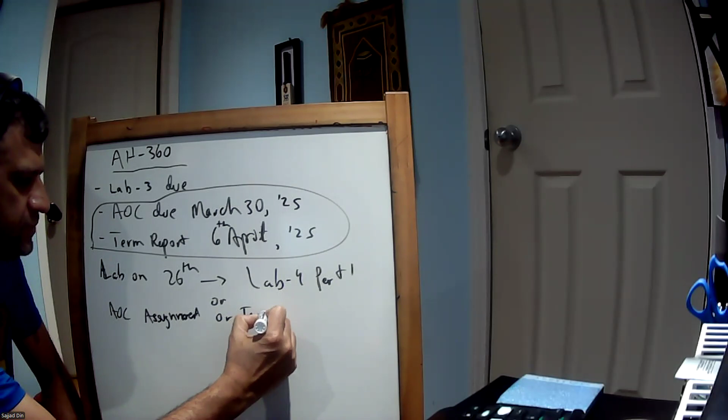So these are a couple of the main items coming up, especially these. Next week, we have our lab on the 26th. So for that, I would suggest you either work on lab 4, part 1, if you haven't, or if you want to take a break because it's not due, or work on the AOC assignment, term report, term project. Okay, so those are key.

But we'll probably have our final or one of our last few lectures on the 28th, online, but also a work session. How does that sound? So next week, we use both sessions to finish these assignments, especially the AOC and the term report.

And then on the 2nd, you will be going to the organic waste lab, the organic waste plant. So that lab will be replaced by Andrew's class on the 3rd. And then on the 4th, we'll have our lecture/lab session in person. The only thing is you'll have to bring your own computer.

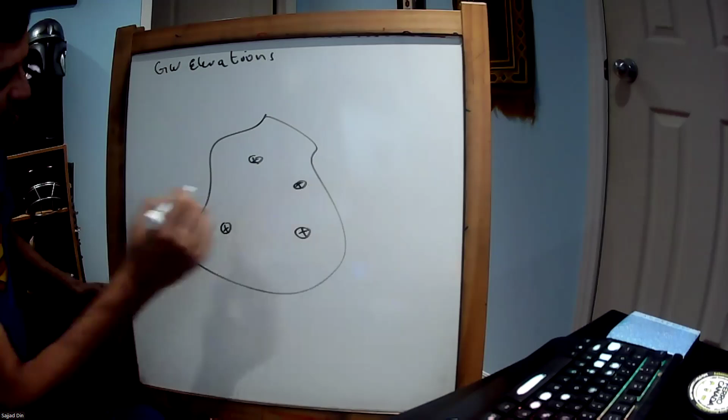Let's say it's not a triangle here, but you've actually got the elevations. We'll put it in different colors. And how did you get that elevation? You measure the water level. So let's say this is 131.10, 136.22, 135.11. It's not always this simple. And you've contoured it, whether you've done it with your hands or done the contours with software. So let's say we're going to use 132. And then you want to label it, so it's in meters above sea level.

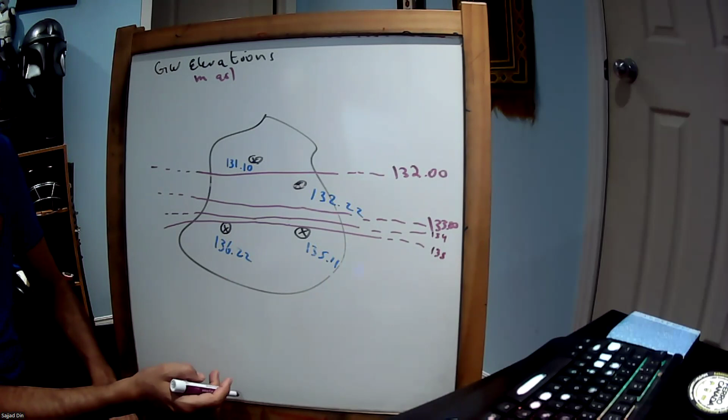And then you've got 133, 134. We've got 135. So here at the groundwater, it's quite - actually, this should never be touching. You've got the groundwater, it's quite steep. When the contours are closer together, the gradient is higher.

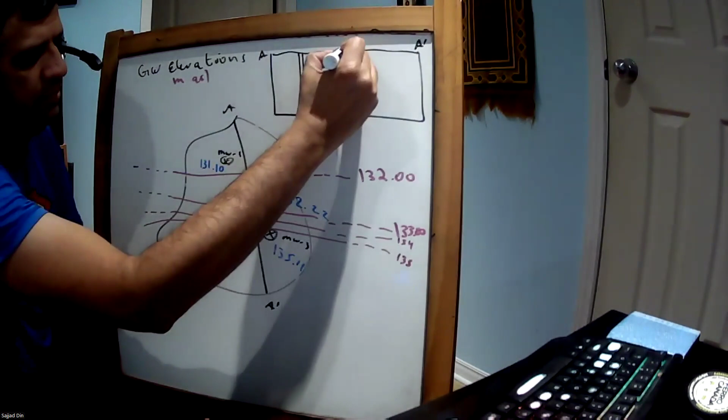Because what's happening here, what you've just mapped, is just imagine it's the cross section of your site. Let's say this is monitoring well 1, monitoring well 2, monitoring well 3, monitoring well 4. And let's say you've drawn a cross section A to A dash. That's A to A dash. It's monitoring well 2, and then monitoring well 3.

Essentially, what you're basically showing here is, see, the dip is much steeper over here. And you guys did this in topography, so I don't want to spend too much time on it.

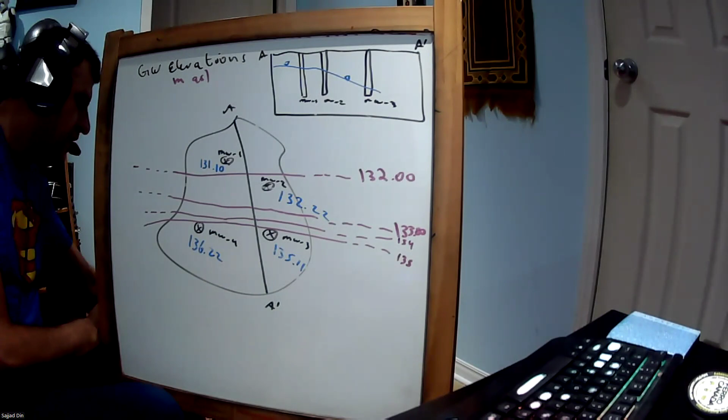But another thing I wanted to point out is you can now, with this information, determine what DH is. What is DH going to be equal to? The difference in the groundwater elevation. Let's say we're trying to determine the groundwater flow. Let's use this: 135.11 minus 131.10. DL is the distance between 1 and 3. Let's say the distance is 67 meters.

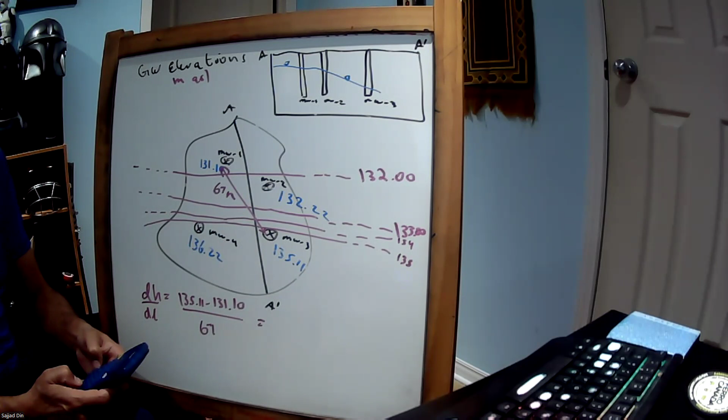Go ahead and calculate that. 135.11 minus 131.1, that's 4.01, divided by 67, that's 0.0598 meters per meter. And what is that? That is also known as the hydraulic gradient.

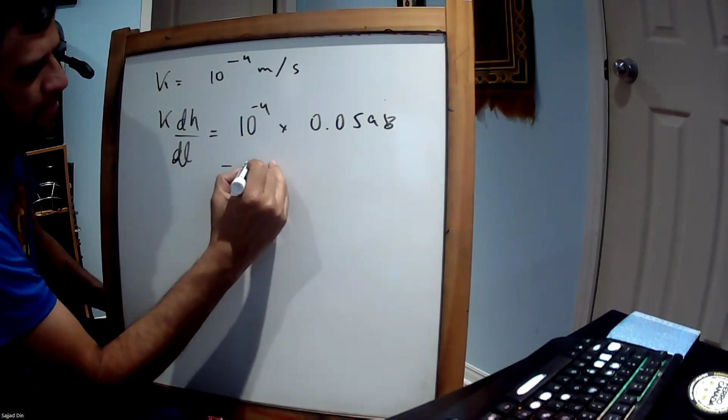Now, if you know the K value, you can multiply it. If you know what K is, let's say it's 10 to the power minus 4 meters per second, you just multiply that by dH by dL. This gets to be 10 to the power minus 4 times 0.0598, so this is equal to 5.98 times 10 to the power minus 6 meters per second.

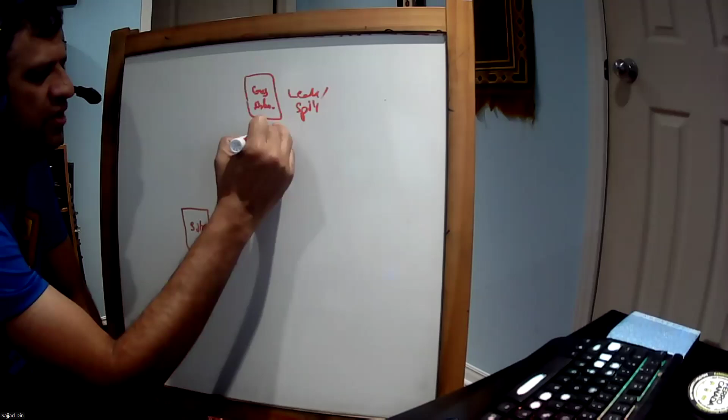So let's consider a situation where you are performing a site assessment. Let's draw your site. That's your site. And you find in your study that there was a gas station here, and the ERIS report says there was a leak or spill, and it was underground. Maybe you found this out through a record of site condition. And you know, based on the map, that the distance from your site is 44 meters.

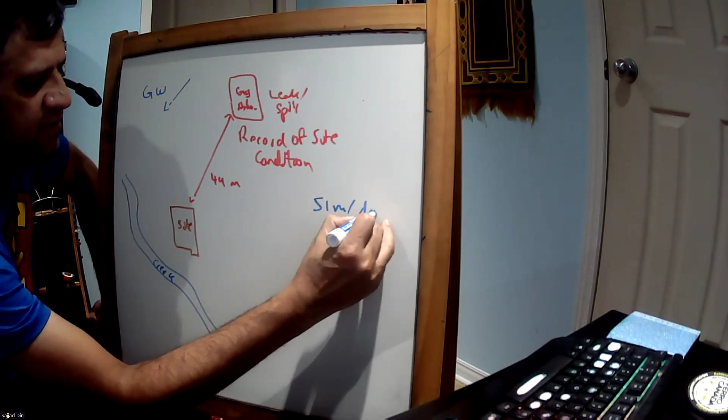You also know, based on your study, that there's a water body nearby, a creek. And the dip of the topography is in this direction, so you surmise that this is where the groundwater's flowing. Now, based on that information and the calculation that you just did, that it goes 51 meters a day, there's a likelihood that your site could have been impacted.

And this is the PCA. So this is the PCA, and this is the area of concern. So this is where you'd put your wells. Let's say you found contamination.

So what are some of the options? And that's where we are getting into now. How do you respond to a spill? Spill response. So we'll go over some of the technologies and methods that you respond to spills.

So first, let's consider a scenario. We're going to go back and forth, but there's two or three types of spills that I'm going to talk about. One is the subsurface, so you're dealing with groundwater contamination. Two is a limited indoor spill, so it's basically superficial. And then there's the major or larger scaled exterior spill, like a railway track. So we're going to be jumping back and forth.

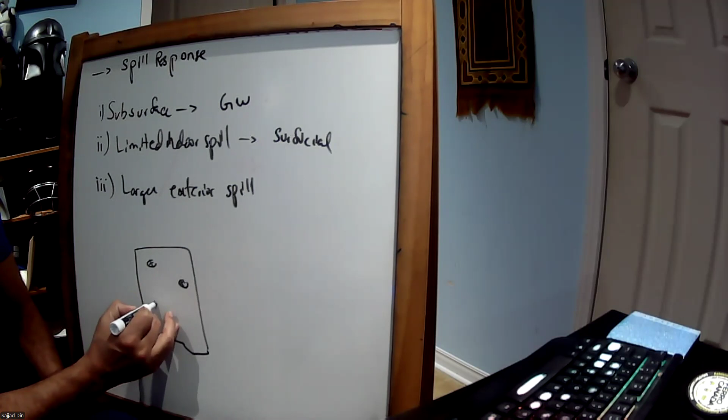In this situation, what we have is we have our site. And we know, let's say we did the study, and we know that we've got contamination because a bunch of the wells came out impacted, and we've delineated that the contamination is limited to this portion. Now, let's say you clean up the site. How do you clean it? Well, there's different methods, but right now, let's say you've cleaned up the site. What's to stop the spill from continuing to come?

Is there anything to stop it from continuing to come? Well, actually, no. But because you've done your groundwater studies and you know the direction, let's say here's the plume. It's the ground surface. Here's your site. And groundwater is flowing in this direction, meaning the plume is flowing like this, and it's entering your site. So in the subsurface, your site boundary is here. So what can be done?

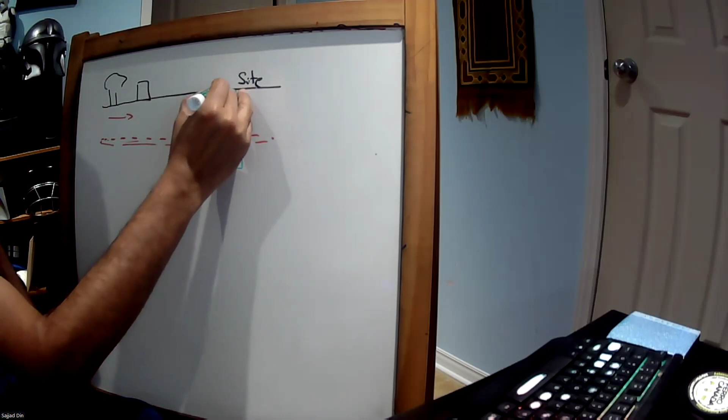What you can do is install what is known as a permeable barrier at the boundary. What you do in the permeable barrier is it's a mixture of sand and zero valent iron, or ZVI. There's companies that can come in and create that trench for you. It's also known as a permeable reactive barrier. So what happens is when the groundwater flows through, it's getting treated.

Let's see if I can find a good one.

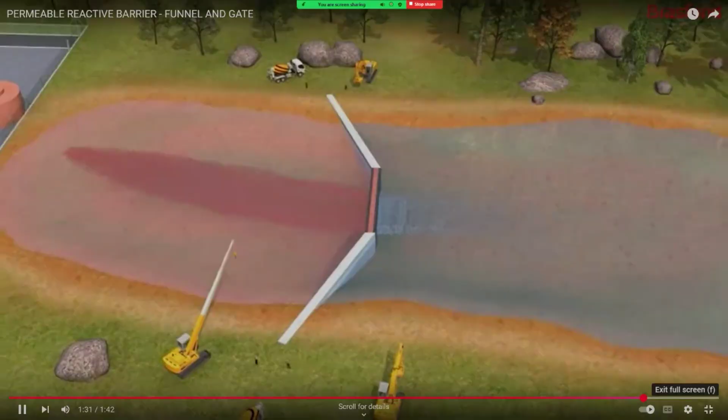So that's one method, a permeable reactive barrier. Another method is a Waterloo barrier, just putting a wall. I'll show you how that's done in a second - a Waterloo barrier for the groundwater. This is especially done when you've got a lot of contamination that you just want to keep out.

I'm just going to explain it here. In case of a Waterloo barrier, you do it slightly differently. So you've got your contamination coming to your site, and you can't really stop it. The client says, no, I'm not going to build a permeable reactive barrier. So they said no to a PRB, permeable reactive barrier - they've already said no. You've got contamination flowing onto your site, toward the site boundary.

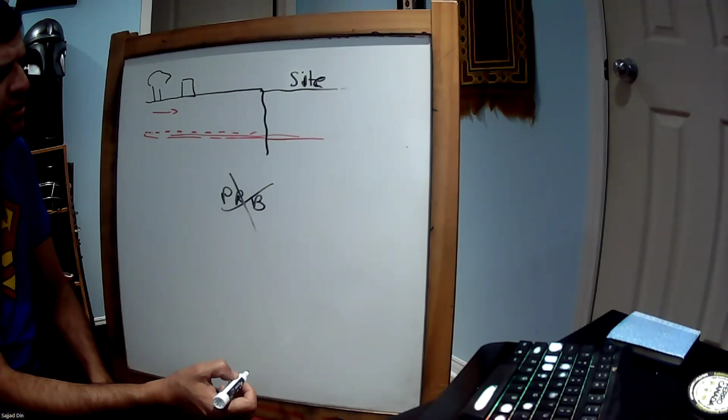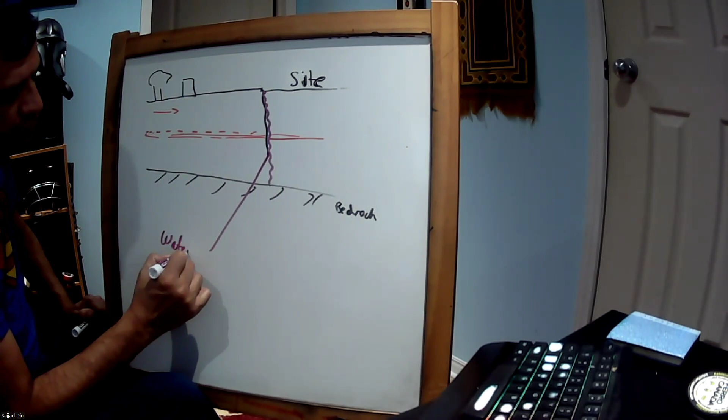So they said no to the barrier. What you can do is, let's say you've got bedrock at about 30 feet, and it's consolidated, so you know that the groundwater is not flowing through it, where you've got this plume. So you can actually go back and install at the property boundary a Waterloo barrier, which is a steel wall, to block this contamination from coming onto your site.

So the hope is over time that it will attenuate, but maybe it won't. So I'm going to share with you something that you might find helpful - some information on permeable reactive barriers or treatment walls. The concept has been around for a while.

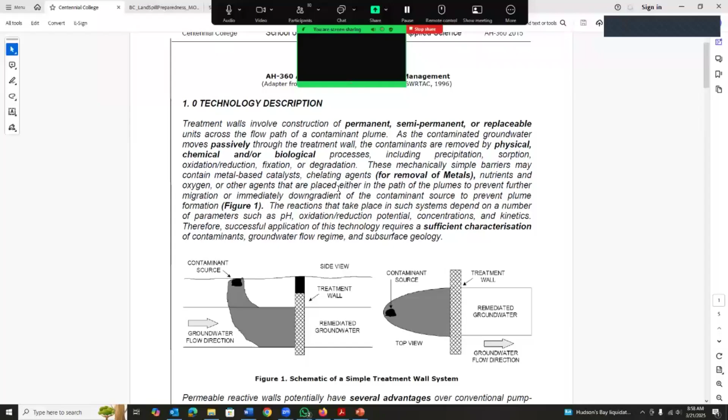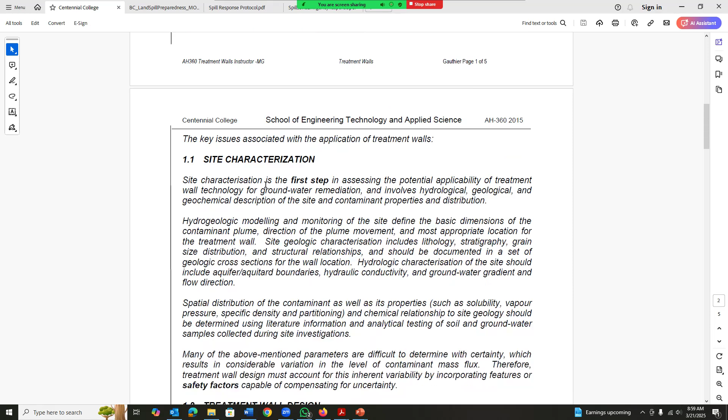But essentially, you've got your contaminant source, the flow direction of groundwater, and the treatment wall, which now allows for treated groundwater to flow through. They don't have to be all the way up to the surface, but they have to be set up in such a way that they cover the groundwater column. Sometimes you might have to replace the material, dig it up and replace it to refresh it, depending on how much contamination you're dealing with.

But the first step is always to characterize the site, do some hydrogeologic modeling, do some aquifer testing. Then based on the contamination you're dealing with, you want to set up the wall with the proper treatment mixture. Like I said, we usually use ZVI, and this is not commonly used for anything other than organics.

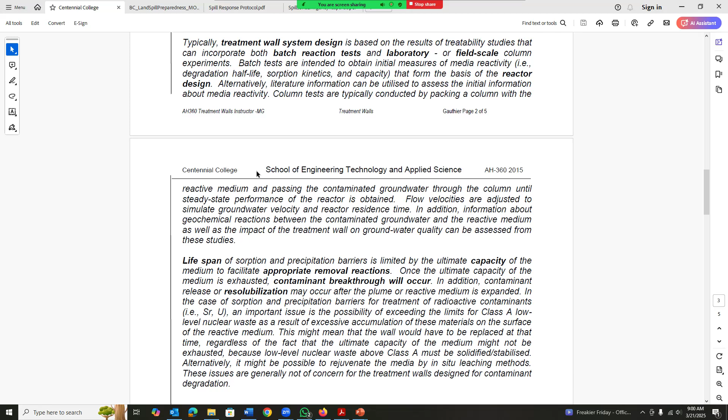Different companies have different methods to dig it, and the company that we've used in order to dig this is known as DeWind. They're an excavation company that does trenching. I haven't been involved in such a project in a little bit of time. They will go ahead and in one pass create the trench, and then you can install your barrier. Because what used to happen in the past is we would have to go out to the site with equipment and install the barrier.

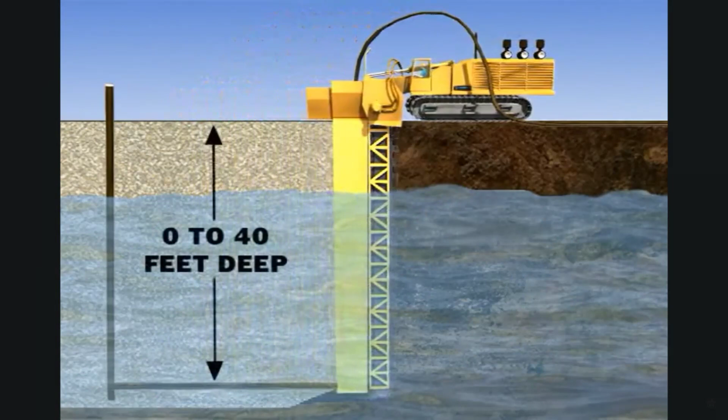They do pretty good work. All right, but in order to understand - what do you need to know?

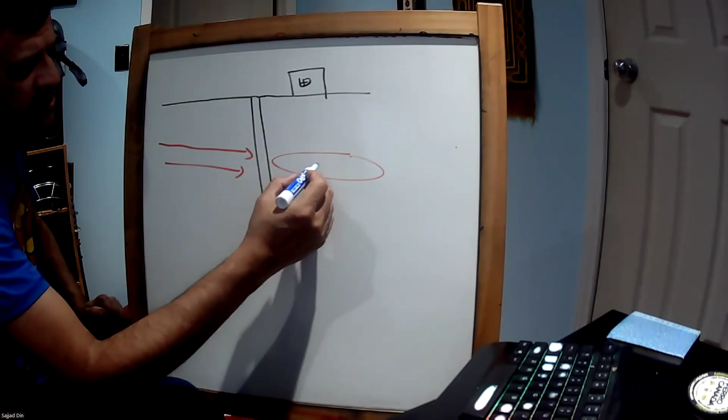That's one way to deal with the water. Another is, now you've got your site - so you've already dealt with the offsite, right? Got your trench, but you still have contamination at your property. So the trench is blocking the offsite, but what about the plume that's already on site? What do you do about this plume that's right here?

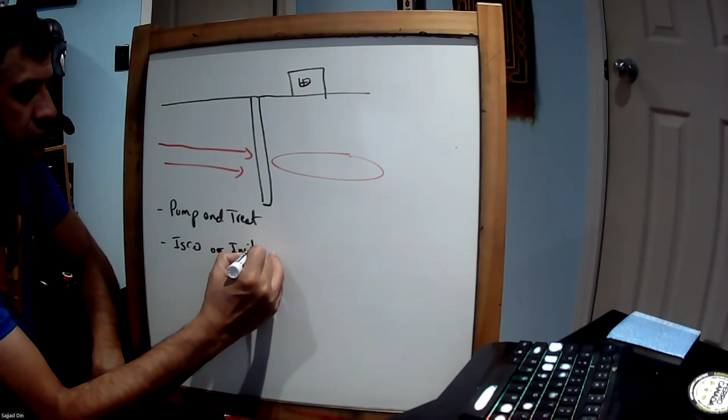So there's a couple of methods to deal with it. Number one, pump and treat, or ex situ - that's one. The other is ISCO, or in situ chemical oxidation.

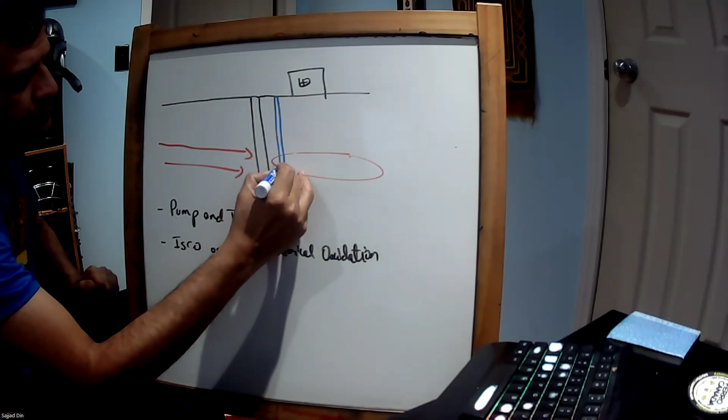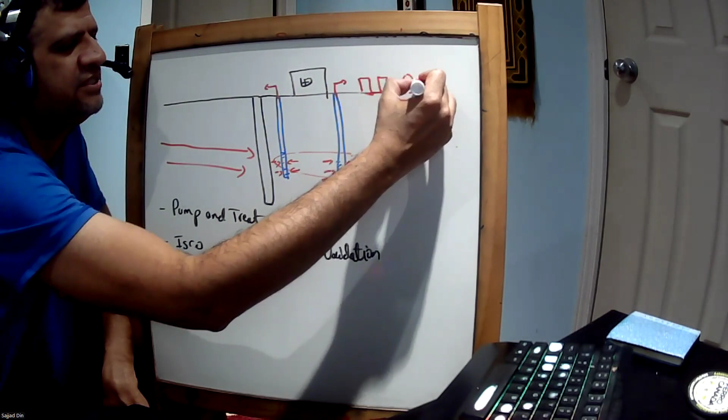So the first is, as it implies, pump and treat. You could put a well into the ground, or a series of wells, and you pump it out. What you're trying to do is pump out the contaminated material, and then you send it to your mobile treatment system. Remember, you designed it last semester. You're pumping it out.

Before you set up the pumping system, what do you want to know about the site? Again, you have to do site characterization. And the second method is in situ chemical oxidation.

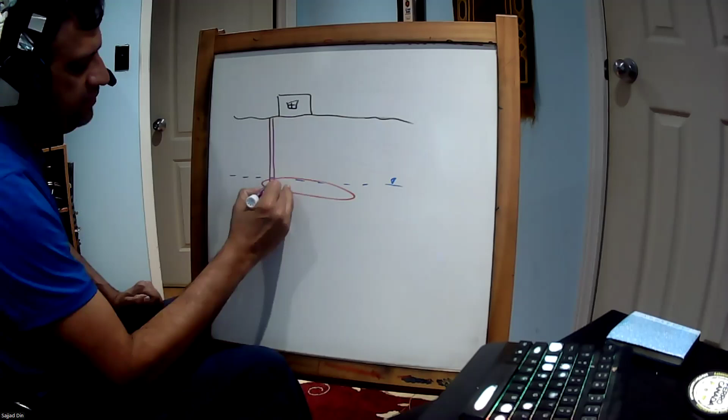You've got your site, got your groundwater plume - it's the groundwater, but it is infested with a plume. You can now perform what I said earlier, which is in situ chemical oxidation, by injecting. So you can inject a chemical like potassium permanganate.

Or sodium peroxide - I don't remember the chemical formula, so I'll actually write it as sodium peroxide. You can also use sodium persulfate. What it does is it oxidizes the chemical. In this case, you're pumping chemical into the ground to create a scenario where your oxidant is breaking down the material. Let's watch this animation of how in situ chemical oxidation works.

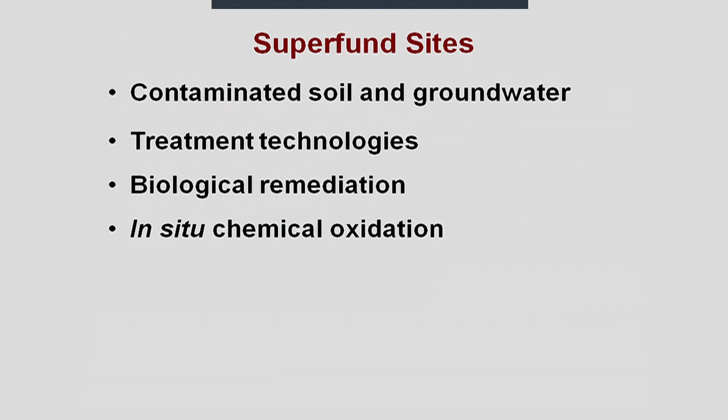A reagent to oxidize these contaminants. There is also a larger group of treatment technologies called in situ chemical oxidation, ISCO for short, that utilize different types of highly oxidative reagents to oxidize these contaminants.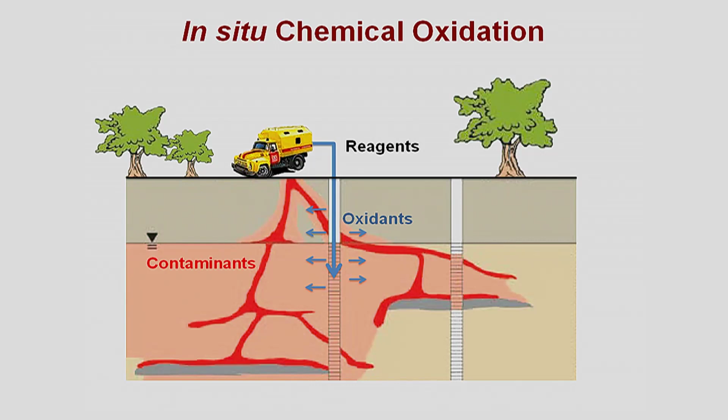So how does in situ chemical oxidation work? Basically, we have a big plume of contaminants in the subsurface, shown in this orange color. When we treat the organic contaminants, we have a truck loaded with reagent, and we inject this reagent into the subsurface. These reagents react with the reactive phases of the soil minerals to generate highly oxidative oxidants, which permeate into the subsurface and oxidize the contaminants.

The traditionally used oxidants for this in situ remediation include hydrogen peroxide. If we look at the chemical structure of hydrogen peroxide, it has a peroxy bond, and it is this peroxy bond that is responsible for the highly oxidative properties of this chemical.

In addition to hydrogen peroxide, a very similar compound is called persulfate. Persulfate shares a very similar chemical structure with hydrogen peroxide - it still has the peroxy bond, but instead of a hydrogen bonded with an oxygen, it is an SO3 group bonded with an oxygen.

So how does sulfate radical formation proceed via persulfate activation? In the subsurface, we have many different types of soil particles enriched in iron elements - basically iron oxides in the +3 oxidation state. When we inject persulfate into the underground, persulfate oxidizes and reacts with iron 3 through a one-electron transfer process as a redox reaction. Persulfate is oxidized into persulfate radical, and in turn iron 3 is reduced to iron 2 in the soil particles. But this is just half of the reaction.

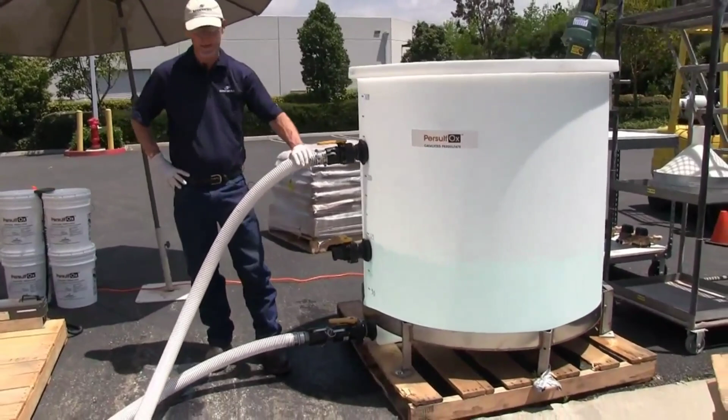A little more detail on the mixing side. I've preloaded 125 gallons of water into our 300 gallon tank. Here's our water level, and you can see everything is connected up to our pump from the tank. We have influent and effluent out of the pump. We've also added a lightning mixer - this is just a traditional vortex mixer. So we'll use both the inline pumping machine as well as the vortex mixer to mix up our PersulfOx.

In most applications, field personnel should allow themselves roughly 15 to 20 minutes to mix a batch of persulfates. So given this kind of setup, this is exactly how it looks.

The ISCO mobile treatment plant treatment system on the surface - they used to have it automated in many sites, but here in Canada it turns out to be a disaster if things go wrong. That's why actually having actual human beings on site, as opposed to robots or running the system remotely, is key so that nothing goes wrong and you're not seeing chemicals being injected and going the wrong way, or having humans exposed to the chemicals, or the system breaking down on site.

As you can see, there's a lot of things that can go wrong. Right now you're looking at picture perfect conditions - this could be Florida or someplace warm. Are we going to get these conditions in Ontario all the time? Of course not. Count on about 15 to 20 minutes.

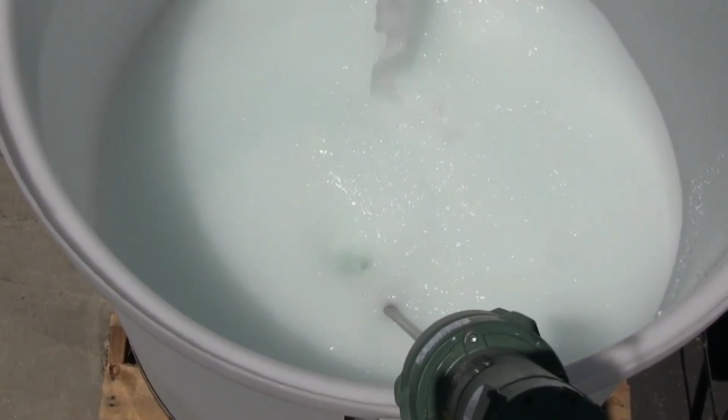So I've been mixing our 15% PersulfOx solution for about 10 minutes or so. We're almost where we need to be on the material - as you can see, it's very soluble. Once this solution is ready, it gets pumped into the injection wells, into the injection points. 100% soluble. After about 15 minutes of mixing, you should be ready to go.

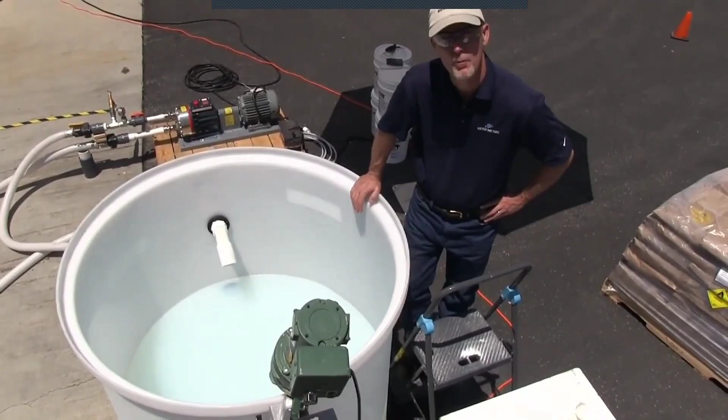Now let's take a look. Once you've injected it, you tend to let it sit and wait, depending on - this was actually not, this is a catalyst. So what that should be was hydrogen peroxide. Let me correct myself.

If you need to use a catalyst, sodium peroxide is used, but the actual oxidizer might be hydrogen peroxide or sodium persulfate. These were two of the common ones. Another one is potassium permanganate.

Once you've injected the material into the ground, you let it mix and work on the different areas or locations of the contaminants. You wait about 3 to 6 weeks, depending on how much you've injected, and then you sample the groundwater again.

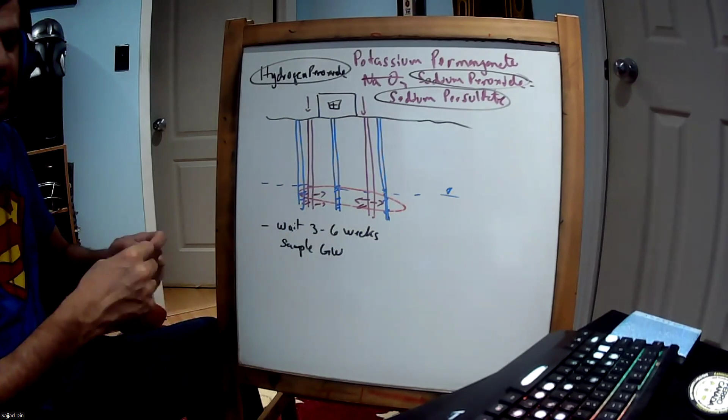Now, if you're using injection wells, you're supposed to have separate monitoring wells. So maybe you've got a monitoring well in between, and a monitoring well over here, to see how the progress is. This is where it becomes interesting, especially in the reporting phase.

Let's say you start off at monitoring well 6, and you've got the contaminant concentration - let's say it's TCE in this case. You're sampling every 3 months, so let's say this is October, January or February, and then May, and so on.

What you're hoping to see is the concentration of the contaminant, especially if you're aggressive, to dip. And if the standard - the MECP standard - is here, you want to see it dip to below that level over time.

Now, a question for you guys. Let's say the cutoff date for the injections - because remember, you wait 4 weeks, you come, you sample, then you come back and inject again. End of injection program. Let's say you've injected here at the start, you inject again, you inject again. Now that's the end of injections.

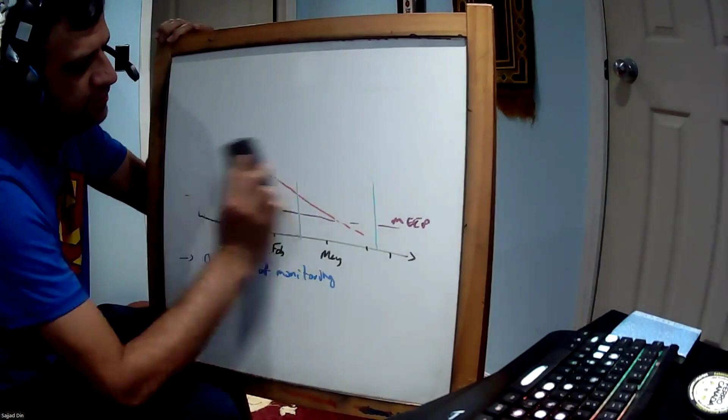Okay, so the next main thing we're going to talk about is what you need to know before you can practice this type of injection. But just to summarize, remember in the pump and treat, the typical treatment train is you might have a settlement tank, and then you'll have filters, and then you might have granular carbon vessels. Or, depending on the contaminant, you might even have activated alumina. So this would be for pump and treat.

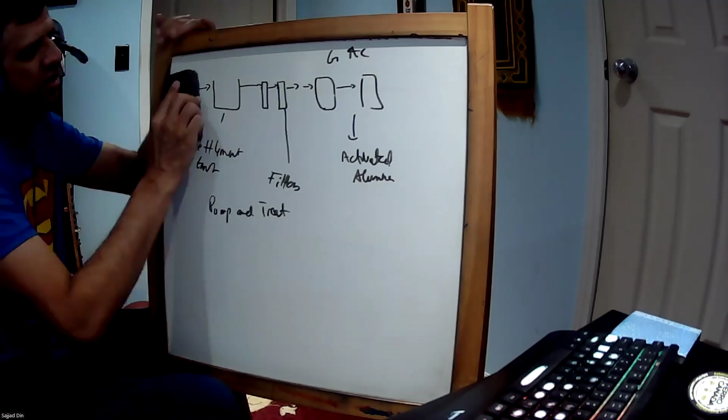But I wanted to mention something: 9 times out of 10, you need to supplement the pump and treat with some form of in situ chemical oxidation. Why? Because our experience shows that in most sites, let's say you've got a contamination level that's over here, and you're trying to achieve a cleanup level over here according to the Ministry of the Environment - these are the concentrations, this is time. Pump and treat has really good initial results very quickly within weeks. Concentrations tend to go down.

But for whatever reason, it seems to plateau and even come up a little bit over time after you've done the initial pumping. But this is where it's important to understand several things before you perform a cleanup at a site.

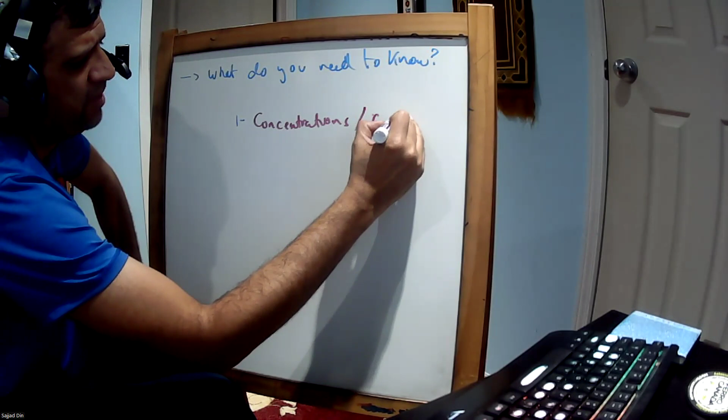So what do you need to know? What do you need to know? Does anybody want to help me with this? So what do you want to know about the site? What's the first thing you want to know? It's a subsurface spill - what do you want to know? How about the contaminants, the concentrations of contaminants and compounds? So what are the parameters? What else do you want to know?

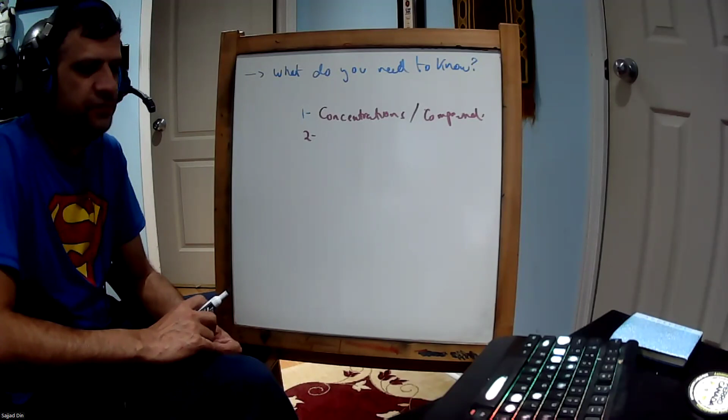What do you need to know? What do you, well, from what you talked about - yeah, you're cutting out. Could I ask Cody to speak on my behalf? Well, it's okay, so I've typed it in the chat. Yeah, sorry.

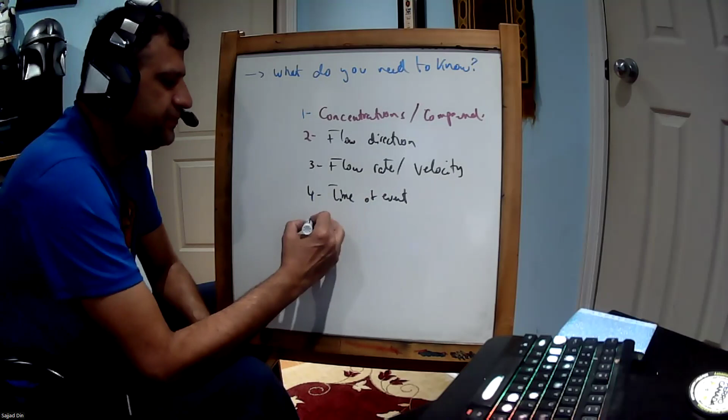Flow direction, 100%. Flow rate, yeah, flow rate, or velocity. We also need to determine the amount of time that has actually elapsed since the spill happened so that we can determine how far it's traveled so far. Yeah, so sometimes you have that information, sometimes you don't. Time of event is definitely crucial. Yeah, if we have it. Okay, that's perfect, that's actually exactly some of the information I was hoping you would come up with. Source - what caused the spill? 100%.

Okay, room number 2.

Who was in room number 2?

We can say that the type of contaminants, whether it's a VOC or something else, is relevant. Yeah, true.

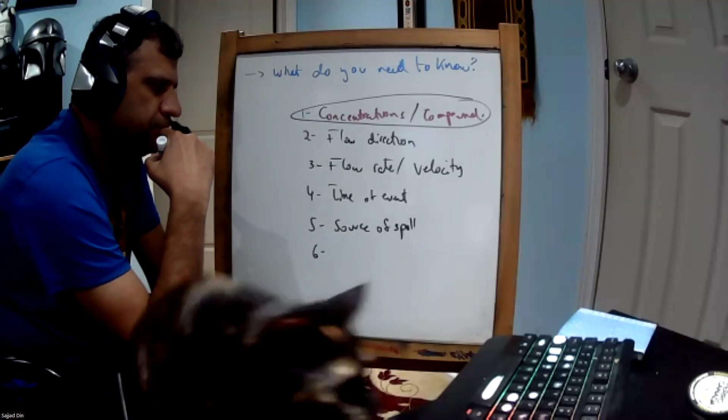What else do you think is missing? And if we are sampling the soil, how much depth are we going to sample? How would we know this before remediation? So we need to know the permeability, the aquifer parameters.

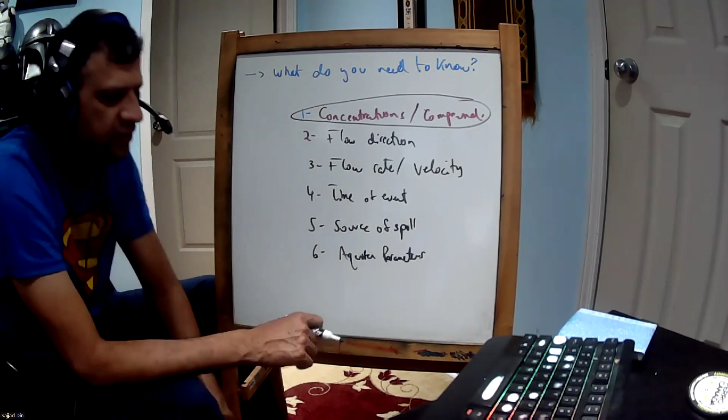Professor, can we also check the wind direction, like for airborne contamination? For a groundwater spill, it has no relevance. But for a surficial spill, yes, you would. The wind doesn't impact the process for a groundwater spill because the concentration in the air is usually not a concern, but that would be the case for a surficial spill for sure.

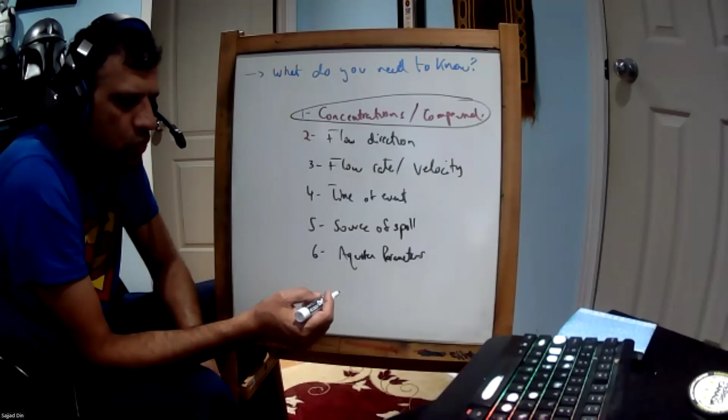So Chinu, were you asking if we should know the depth of the sample? No, I was saying about the permeability, how far it extends. Yeah, you need to do the aquifer parameters. And then the last one is we need to determine the areal extent of the contamination, delineation if you can.

So I'm going to touch on these points, and then we'll continue the conversation.

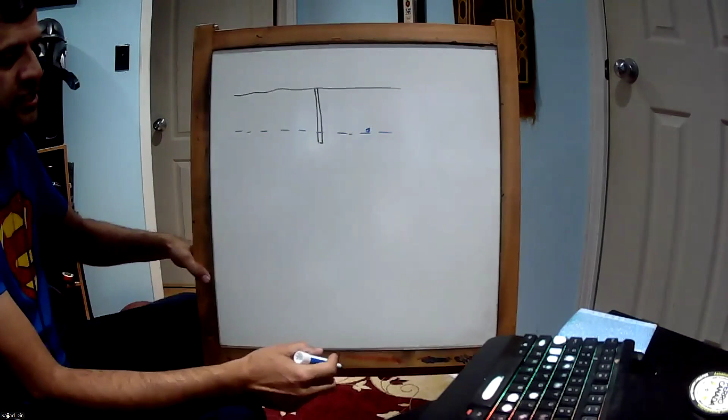So let's say you have a bunch of wells that you drilled on site, and you tested the aquifer and the groundwater. Since we're dealing with just a groundwater spill right now, we're going to focus on groundwater contamination. We'll spend a little time on excavation in the waste portion of the other course, but here we focus more on groundwater contamination. So what Crispin just mentioned, which was excellent, was: if you found contamination, how far do you think it went?

How deep do you think it went? That's what it's called. What you do, this is the horizontal delineation. And then you might also want to know how deep it's gone. That's the vertical delineation. I'm going to explain why this is important.

In order to do that, you add more wells. Why is this important? So let's say you have the areal extent of the plume on your site as 700 square meters, and you've determined the aquifer thickness where it is, from a depth of 2 meters to 4 meters, which equals 2 meters thickness. So that means the volume of the plume is 700 times 2, which equals 1,400 cubic meters.

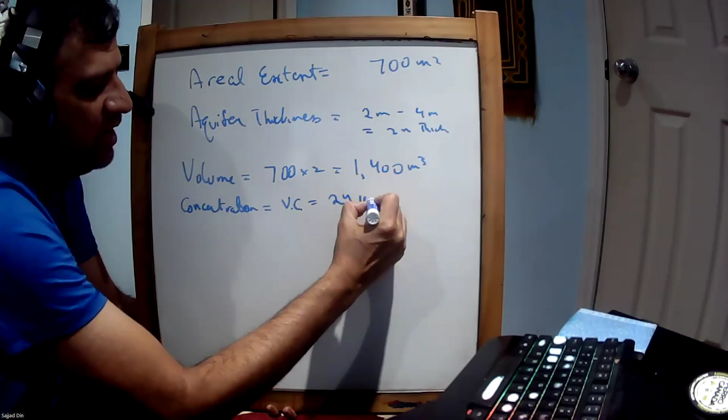Now, your concentration of contaminant, let's say just for one contaminant, vinyl chloride, VC, is 24 micrograms per liter. So what is the contaminant load that you're dealing with? The contaminant load can be calculated because that will help you design the treatment project, like how much chemical you need to inject, how long, at what depths, at what frequency, and the concentration of the oxidant. That's beyond the scope of this course, but the contaminant load helps you design the overall project.

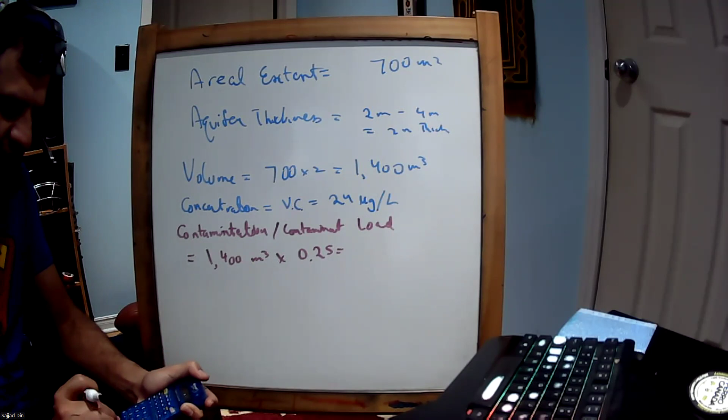That's going to be equal to 1,400 cubic meters as the volume. But is that really the volume? Because if the porosity is 25%, then the actual volume is 1,400 times 0.25, which equals 350 cubic meters. Convert that to liters: 350 times 1,000 equals 350,000 liters. We have 24 micrograms per liter.

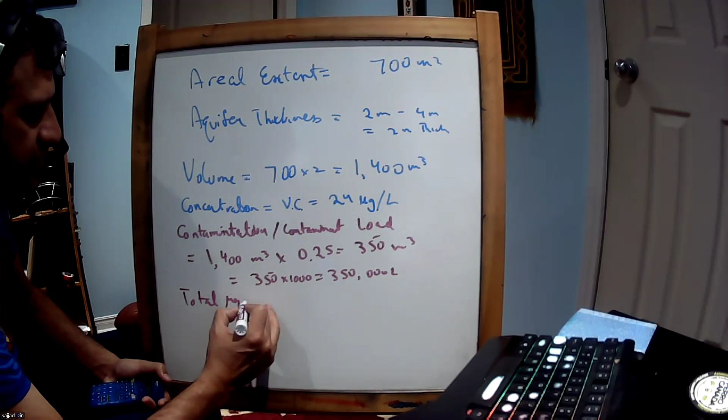So total micrograms is equal to 24 times 350,000. What is that equal to? 8.4 million micrograms. What is that in grams? 8.4 grams. That is the amount of actual chemical VC that you're dealing with, and you can design accordingly. So that was one of the things you guys mentioned, which was excellent.

Another thing we've already determined is flow direction, right? We've already talked about how to determine that at your site. Flow rate - this is where it becomes extremely dicey, so we're going to do this a little bit carefully. But this is part of your lab 4.

Remember I talked about the slug tests? We're going to get into that detail now. It's a long video, but it's important - we're probably going to split it up. Slug tests to get the aquifer parameters, flow rates, etc.

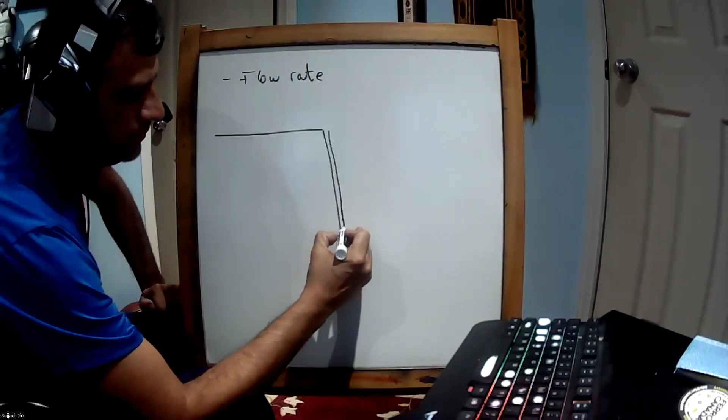Okay, so now what's happening here? What's happening here is that they have - so basically what was being described is you've got your well. That's the static water, right? He measured it - I don't remember if you guys noticed - he measured it, I think it was 2.75 meters below ground surface.

Then he dropped the slug, and it raised the water level - that was 2.56, I think. And now what's going to happen is that over time this level is going to stabilize. And what you can do is enter that data, how long it took. So in this case, let's say you've got the static water level minus, or the dynamic water level, the new water level, minus the static water level. That's going to be large at the start, but it's going to go down over time. And how fast this stabilizes helps you determine K.

Now, something I want to point out here which is going to help you in your lab number 4. So I'm going to set up a scenario, and I want you guys to remember this. You want to know how long it took for the water to recover 37% recovery, or recharge, of the well.

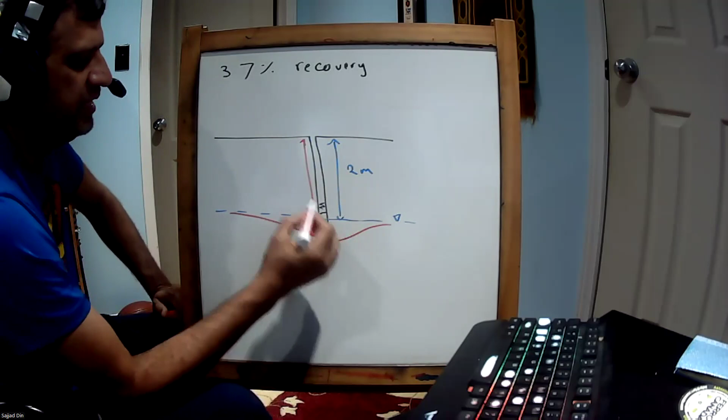So let's say you've got a situation here. We've got a well performing, and in this case we remove a slug. The static water level, let's say it's 2 meters below grade. We remove a slug of water, a little amount of water, or we pump out some water. And now the dynamic water level at the end of pumping is 3 meters. Then we watch the recovery. So we've got initially the difference between the two.

That would be called drawdown. So drawdown would be, in this case, the dynamic water level, 3 meters minus 2 meters. So that's 1 meter, that's the drawdown. So at the start, the drawdown is 1, but as the water keeps filling up, the drawdown reduces.

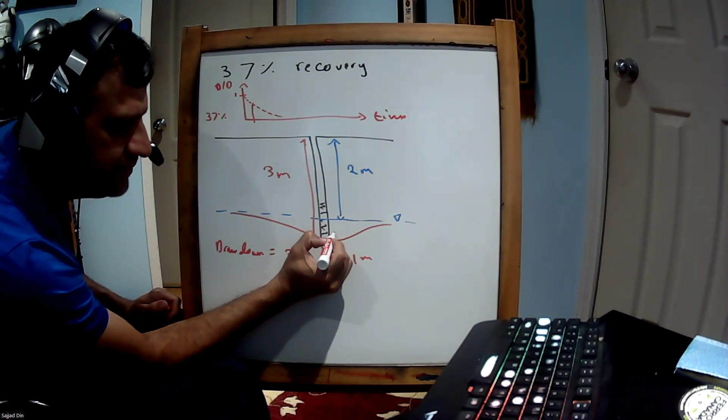And what you're looking for is you want to see how much time passed for 37% recovery. Meaning, how much time passes for this to recover 0.37 meters. Does that make sense to you guys? This is going to be helpful to you in lab number 4, where you're going to be using Hvorslev's equation.

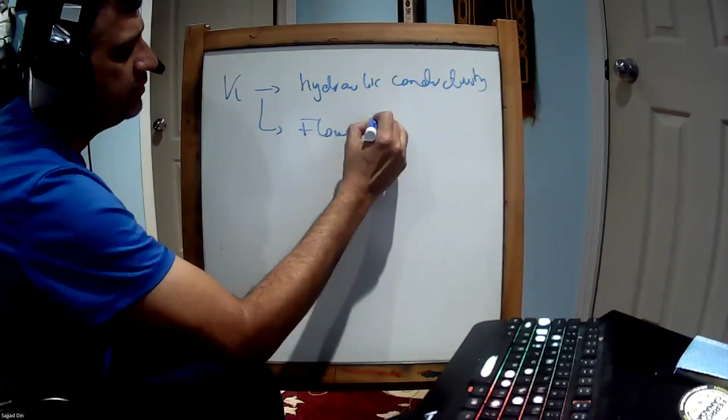And that will help you determine K. Once you know K, based on this type of test, once you know K, it can help you determine, which is the hydraulic conductivity. It can help you determine the flow rate or the velocity. And that will be of high importance in a remediation project of a spill.

So, coming to the next item, we can use software to enter this data and calculate this. So let's see. AqTeSolv is one of the more famous ones. So let's see a demo for AqTeSolv. And then we'll take our next break, and then we'll continue with the last part of today's class. So AqTeSolv.

We don't have time in the class to work on it, and it's a little bit pricey, so we haven't really done anything with it, but you can download the demo version. Let's go ahead. It's commercial software called AqTeSolv to determine parameters such as transmissivity and storativity for an aquifer. So first thing is you need to download the data, download the software. AqTeSolv provides a demo version of that, which is free. But if you look for the full functionality, then you have to pay for the price, which is around several hundred dollars. Okay, so once you download your data, once you download your software, then let's take a look at the questions that we have.

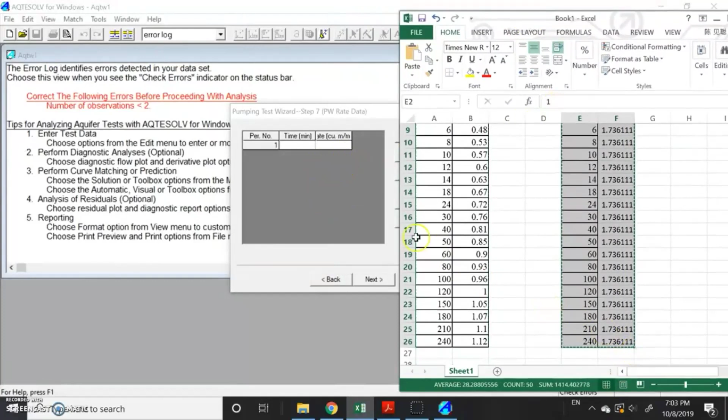And then click next. So this is the place that you can specify your data set. I copy pasted the data from the PDF file. And here is the place that you need to specify your pumping rate. As we can see, the data we have is basically a constant pumping rate, so it doesn't really matter too much. However, in certain conditions your pumping rate may be different, then you would just change correspondingly. After you do this pasting, you can see the first row doesn't really have data, which doesn't really matter too much. And then you click next.

And then here's the place that you tell the software where exactly your observation well locates. From the question, it's 60 meters away, so we just put 60 there and then click next, and then next for this as well.

And then we leave this the same as what we did before for the pump well. And then this is the place that you tell the software what is your drawdown measurement. So I convert the units as well, and then you copy and paste. And then you click next.

So this is all the things that we need. You can see that the error log identifies errors detected in your data set. Choose a view when you see the check errors indicator on the status bar. As you can see, the fonts being highlighted in the correct way show that no errors are detected in the data set, which means we're all good to go to determine our data.

So for example, we can display the time and displacement. So this is also related. We can see that the time is in a log scale, which is usually how you can do that by hand as well. And then this is the data that is being shown up here.

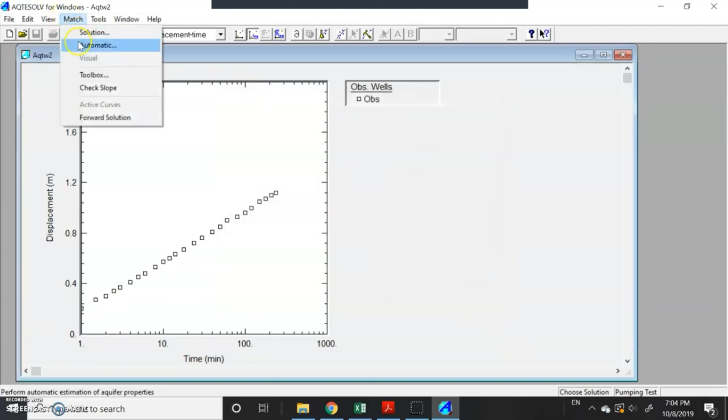And the next thing is that we want to fit some solutions. So first, we can, it's basically you click this match, and then solution, automatic solution doesn't matter too much. And then you have to activate the solutions, so solutions that are currently inactive. And then here we are working with the confined aquifer.

So you click confined aquifer and you can choose a Theis solution or a different kind of solution. There are all different kinds of solutions available. If you're interested in knowing what exactly each solution represents in terms of equations, you can always check those things on the left, as you can see. So here I'm just going to use the first one, which is the Theis solution. And because we don't really have recovery data here as well, then click OK. Now you can see there's a line showing up, which is basically the best fit.

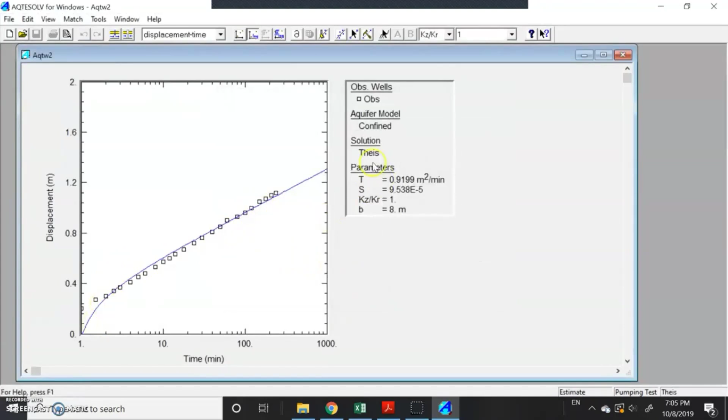This is basically indicating which calculation method you're using. The Hvorslev is the one that you're going to use for your lab, but in the software you can ask it to use all these different types of methods. When you're talking about confined aquifer, you're telling the software that it is not exposed to infiltration from the surface, that there's a confining layer above the aquifer. So we don't really have recovery data here, click OK, and now you can see there's a line showing up, which is basically the best fit. So anyways, that is what I wanted to share with you.

AQTESOLV, again, you're not really going to be using it in this course. Lab number 4 is where you're going to calculate the flow rate, and you've already started on the hydraulic gradient. So next week, what I'm thinking is I'll give you guys the second part of lab number 4, so you can do that on your own time. And in the theory portion next week, we'll use that to work on your projects to finish them off.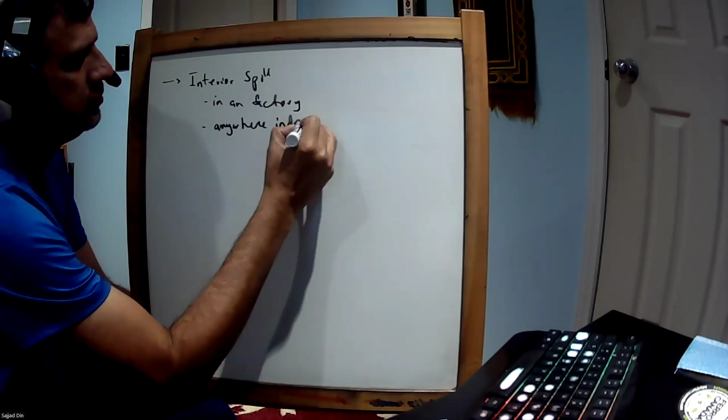So there's a few types of spills that we tend to deal with. It might be an indoor or interior spill, in an office, in a factory setting, or anywhere indoors. Usually what ends up happening is, you should have a spill kit ready, hopefully with secondary containment, though they don't always have it. In certain organizations and facilities, let's say this is the factory, they will actually have drainage trenches lined up across the facility. So if a spill does happen, it goes into a drainage trench, and these trenches lead to an oil water separator.

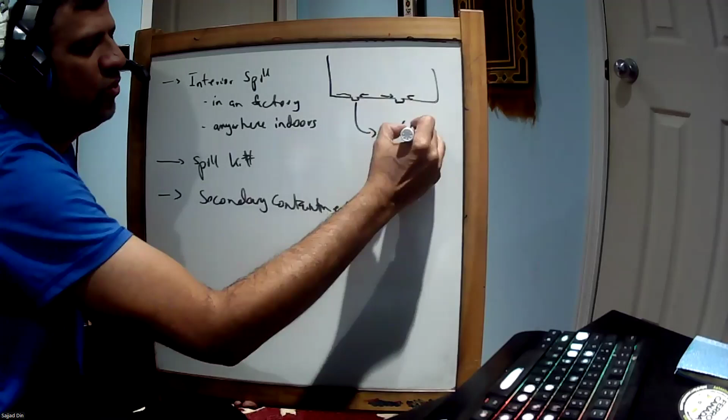Now, a spill kit could be kitty litter and so on. The main thing when you have a spill of a chemical is, number one, to protect people. So you must have hazmat suits and breathing apparatus ready, depending on the chemical. And you need to block drains, so you don't want the material going into drains like a sanitary or storm sewer. You do not want the spill to enter the sewer, because then you might have to get the ministry involved.

Okay, let's watch a corporate training clip about interior spill response and see what they have to say.

One of the founders of New Pig Corporation: we're serious about our role as the leader in leak and spill response. Your training needs led us to produce this and other videos relating to hazmat spill response. Extensive work went into this video called Spill Drill. We hope it becomes an important part of your spill response training program. Let us know what you think. And now, Spill Drill.

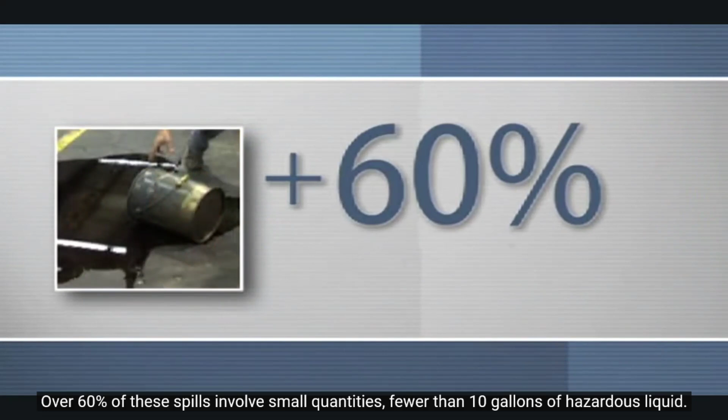Look around. Liquids are everywhere. They have a definite volume, but no form. They're fluid, they flow. Some are harmless, others are corrosive, reactive, flammable, or toxic. They are lubricants and fuels, paints and coatings, hardeners, degreasers, neutralizers, and acids. Wherever you have liquids, you have the possibility of spills, leaks, or releases. Most reportable spills occur in fixed facilities: factories, laboratories, plants, and mills. In one year alone, over 34,000 hazmat incidents were reported to the National Response Center. Over 60% of these spills involve small quantities, fewer than 10 gallons of hazardous liquid. Most people think spills can't happen to them, but spills can happen at any moment in your facility. And that's why you must practice and be ready to respond. You must drill to be prepared for a spill. You need to know 7 simple steps. If you follow them, you will protect yourself, your fellow employees, and your environment. This is Spill Drill.

When a spill occurs, you have to be prepared. Start with familiarizing yourself with the facility's contingency or emergency response plan. You must be aware of the spill potential in your plant. Every minute is critical to keep everyone safe. Since no two incidents are alike, you have to be ready to take quick action.

Response to a hazmat spill requires each of these essential steps: assess the risk, protect yourself, stop the source, confine the spill, clean up, decontaminate, and report.

Assessing the risk is continuous work, not only to address the level of protection and respiratory protection, but also throughout the cleanup and the decontamination. This is a process that never stops.

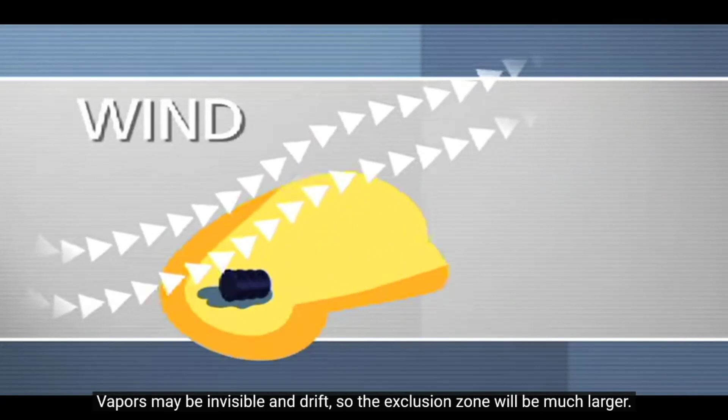Vapors may be invisible and drift, so the exclusion zone will be much larger. Vapors may be heavier than air and sink and spread, or they may be lighter than air and rise and disperse, or rise and become trapped. You may encounter isolated pockets of vapor.

Other questions to ask yourself are: how much liquid is spilled? Which way is it moving? And what's in its path? You must try to keep contaminants out of soil, groundwater, and water.

So essentially, many of the steps being mentioned are steps you could also take whether it's an outdoor spill affecting waterways. This video covers a lot of the basics, and I want you guys to pay close attention because this is one of your final project questions. These are a lot of steps, that's why you must keep practicing and familiarize yourself with the procedure and equipment. It is critical that you are prepared for the final assignment, final assessment.

After assessing risk and dressing appropriately for the hazards, you've now contained the spill. But remember, say it's a 55-gallon drum, that spill is still leaking. So we've contained what's spilled, now we need to stop the spill. How are you going to do that? Based on your container, whether it's a 55-gallon drum, a tank car, or a 9,000-gallon tank truck, you're going to stop the leak to prevent that spill from getting larger. The sooner you can stop the leak, the smaller your incident remains and the easier it will be to mitigate.

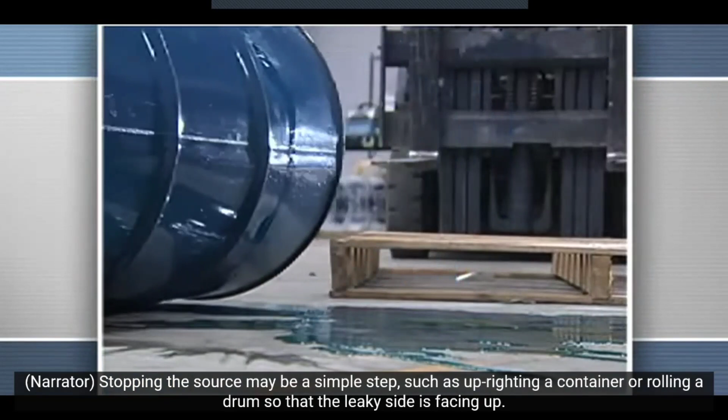Stopping the source may be a simple step, such as uprighting a container or rolling a drum so that the leaky side is facing up. You may have to turn a valve or an emergency shutoff, or plug or patch a leak. A temporary repair job with a wooden dowel could do the trick. Self-tapping screws or a special quick-setting epoxy could stop the source of the spill.

Contents of a spilled drum can be transferred to a new container. A reusable patch can be applied. Each situation is different, that's why you should familiarize yourself with the options to stop the source.

Confining the spill means you want to reduce the footprint of the spill as much as possible, and you do that in different ways depending on the material. You can dike, divert, dam, neutralize, or absorb. These are all different types of supplies you need on hand to perform this function. Confinement means limiting the spill area. The faster you can stop the source, the less liquid you'll have to recover. Generally, the sooner you can confine the spill, the less area you'll have to decontaminate.

So these are called booms or absorbent socks. Different people use different words, but you set these up and they absorb and contain the spill. Later, for a very small spill, you simply wipe it up. For a larger spill, confinement might mean diking, damming, diverting, or otherwise confining the liquid to keep it from spreading.

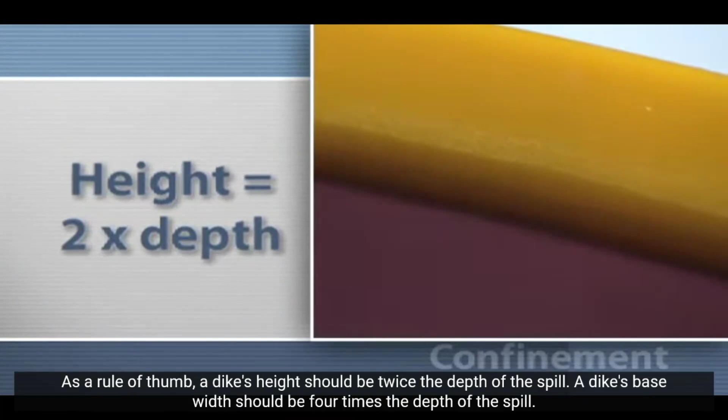A strong liquid flow or large amount of liquid may require a secondary containment line. A non-absorbent dike is heavy and contains the flow but does not absorb the liquid. As a rule of thumb, a dike's height should be twice the depth of the spill, and its base width should be 4 times the depth of the spill.

A common mistake is trying to employ a dike too close to a moving spill. Give yourself a little distance. You don't want spilled liquid to reach the dike line before the dike can be finished. Confining the spill is critical to prevent the liquid from spreading to other parts of the facility and to keep you and others safe. You must be prepared to confine the spill.

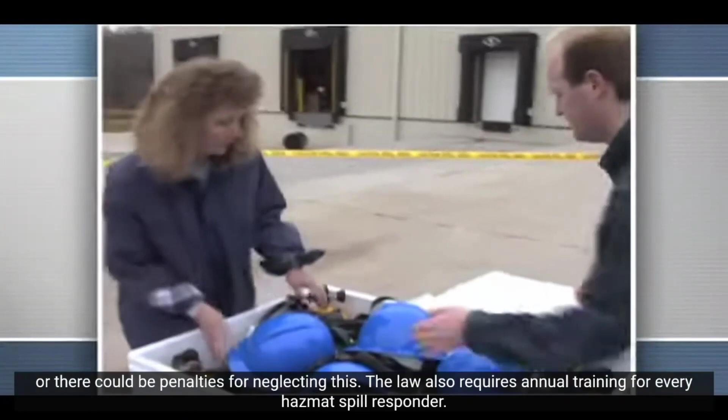There are a few other factors you may have to consider. The spill site must be evacuated and safely cordoned off. Check on and off the site to see if someone was affected by the chemical, heat, or vapors. If you find someone, evacuate them through your decontamination and control zone.

Look around for other complicating factors, such as open flames, heat or ignition sources, vapors, fumes, ventilation fans, wind direction, open drains, pressurized containers, strange noises, or anything else unusual.

Be sure you spill drill. Schedule regular practice drills. Take each drill seriously because it may cost you or your friend a life.

When a spill occurs, just remember the 7 steps that you practice in the spill drill: assess the risk, protect yourself, stop the source, confine the spill, clean up, decontaminate, and report.

The more practice you have, the better those decisions will be.

Hazmat responders have a... Okay, so that covers that. Now there are guidances that I think I've posted for you guys. Let me just double check. Just double check.

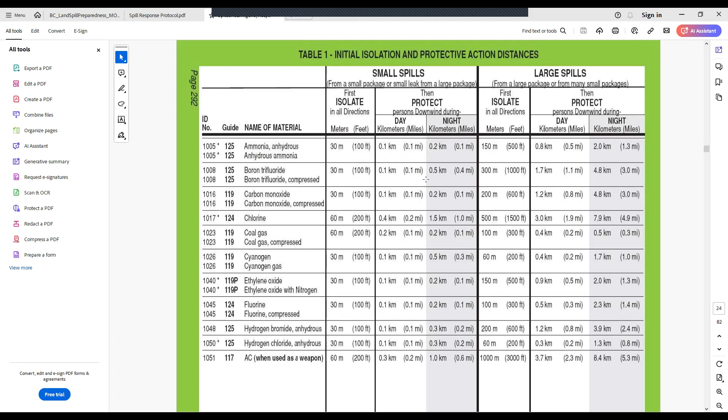If you have a spill, I'm going to be giving you a scenario where you might have to set up an isolation zone. Depending on the type of spill, let's say it's a large spill of 208 liters or more, and if it's a hazardous material, you need to set up an isolation zone and make sure nobody downwind could be affected. That's based on the chemical involved.

If it happens during the day, it's less of an issue because of dispersion in the atmosphere. But if it happens at night, it can have higher toxic or contaminant levels in the atmosphere. Make sure that you take advantage of those items.

If you wanted to watch the video again or read the document about how to respond to the spill - most companies will have a spill response protocol.

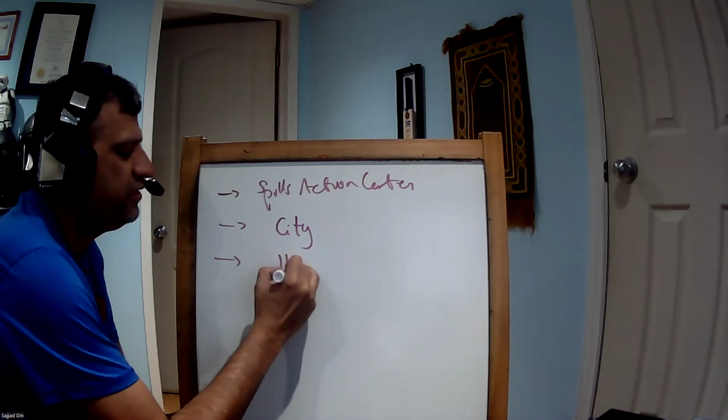For example, they will say one of the things you need to do is call the Spills Action Center, call the city that you're working in, and let your health and safety officer know of the situation.

Essentially, the steps that should be followed are as listed here, basically the same or similar to what we went through. So check for physical hazards.

Then if it's wet or muddy, be careful because you could have a slip, trip, and fall, and put up signage to warn other people.

Next, evacuate the area if you're not able to handle it. But if you are, identify the source and cut it off, and let the supervisor know what's going on.

Try to prevent the spill from entering catch basins or stormwater drainage areas. Use an impermeable barrier or diking. You should have a spill kit for this.

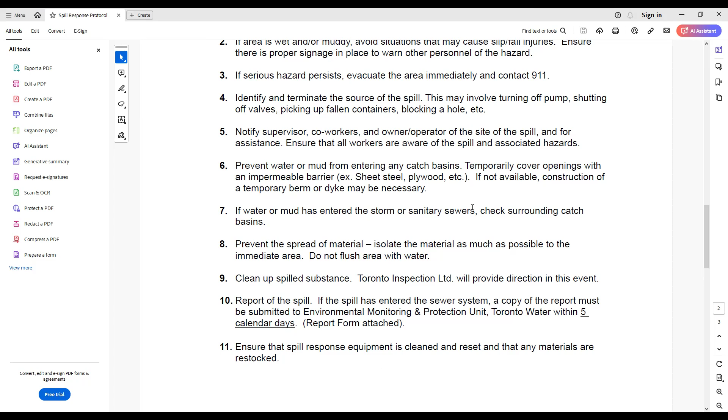Now, if it does enter, what you do is try to block off this, or try to divert the contaminant. You need to make sure that the spill gets reported and come back for the cleanup as needed, as was discussed in that video.

So that is the end of that. Any questions?

Professor, the documents that you were showing, is it shared? Week 10? Do you see it in week 10?

Yeah, so those will help you because there is a question in the final assignment, the take-home assignment. Either you can use some of the steps in the video, or some of the steps we mentioned, but you have to outline a spill response. It's going to be a question in your final.

We do have, for the superficial spills, one more session before the end of the course. Ruslan from the Spills Action Center will be coming and visiting us as a guest speaker.